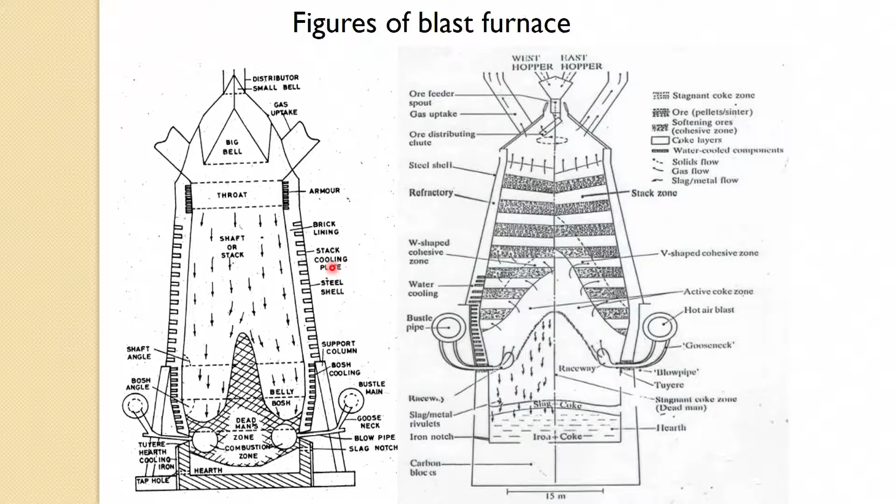So, there are two important operations in the blast furnace. One is the blow in and another is the blow out process of a blast furnace. So, a process to start a new or relined blast furnace is called blow in. So, either it can be a new furnace or it could be a relined one. So, the main steps in this process, how to start the new furnace,

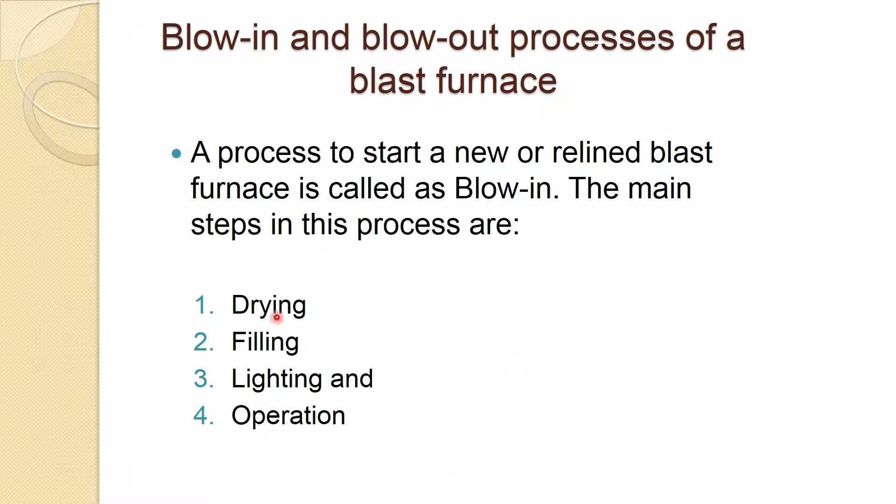are drying, filling, lighting, and finally the operation. So, we will discuss these 4 steps one by one, so you can understand the meaning of all these and how long it takes. So, the first step is drying.

So, a newly lined furnace contains a significant amount of moisture, which must be removed before the furnace is put into normal operation. So, this is a very critical and very important step, and one has to make sure all moisture is driven away, and the time spent on this is worth it rather than later regretting when some problem comes up during the operation of the blast furnace. So, it is worth spending time on removing the moisture completely from the bricks and other places.

And this can be achieved by adopting one of the following methods. Either supply hot blast into the furnace from the stove. So, if there are existing blast furnaces in the plant, you can always use their stoves to supply the hot blast. The initial blast temperature is around 200 degrees Celsius, which is slowly raised to 400 degrees Celsius, keeping the blast volume low.

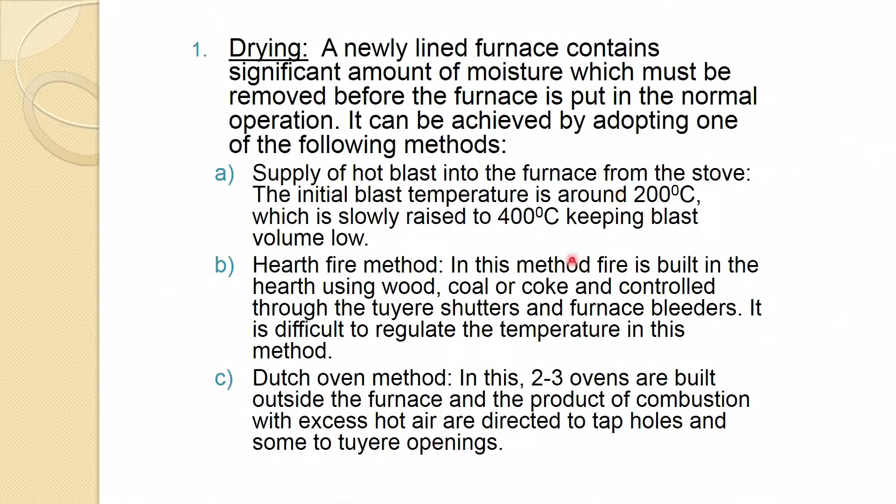So, by adopting one of these methods, one can remove the moisture from a new blast furnace or relined furnace, which is an essential step toward the operation. So, the second step is the filling. After drying and clearing of the furnace, if you have used the second method or some other, you have to remove whatever is left over there. After clearing of the furnace, its temperature is brought down by turning on the coolers, and inspection is carried out of all the material, mechanical, electrical and physical equipment before filling the furnace.

So, this is a very important and essential part in all blast furnace start-ups, because this is the last chance to rectify any problem in any of the equipment. Coolers are on, so the temperature goes down, and even personnel can go inside and check things, and check outside: cooler, mechanical, electrical, physical, that all things are running, and whether there is any problem, because when the furnace is in operation, all these things are quite expensive and very difficult to maintain. So, this to-do list is prepared, and all checking takes place during this time before filling.

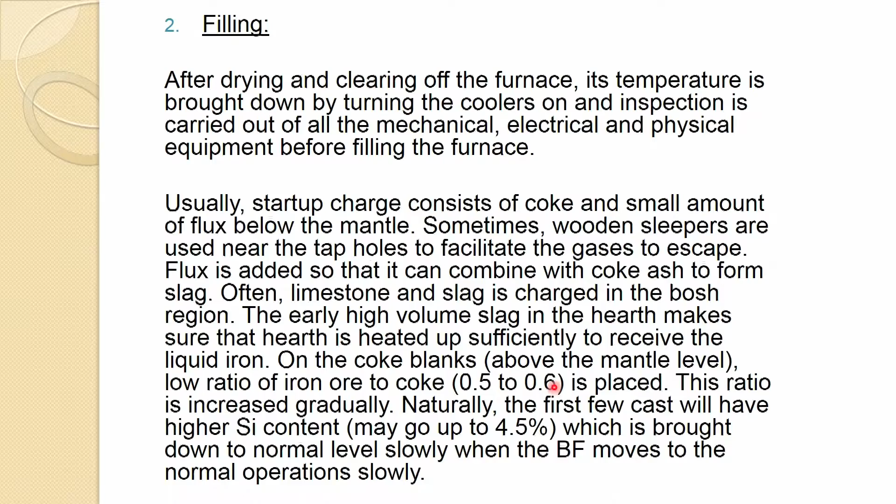So, as we mentioned in this slide, the ratio of iron ore to coke is 0.5 to 0.6, and slowly you increase it by 0.05 or 0.3 sort of ratio. Another way of doing it is to analyze the CO/CO2 ratio, and based on that you can slowly increase the iron ore content in the charge until normal operation resumes.

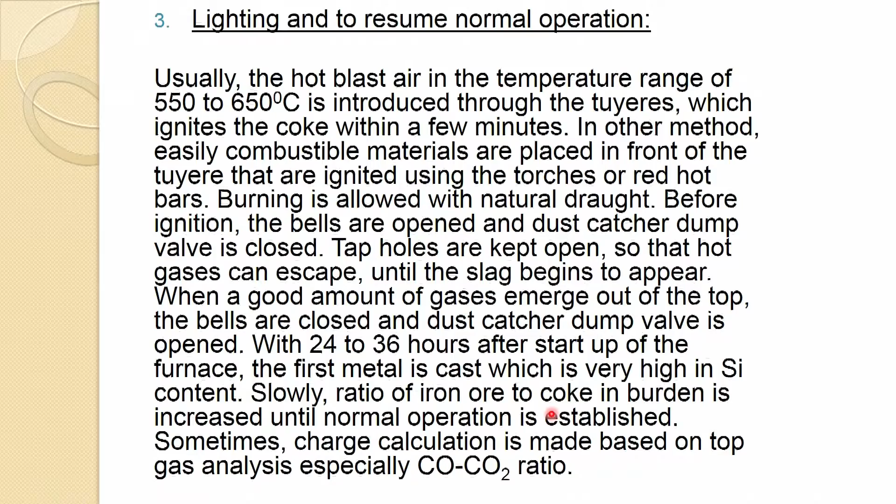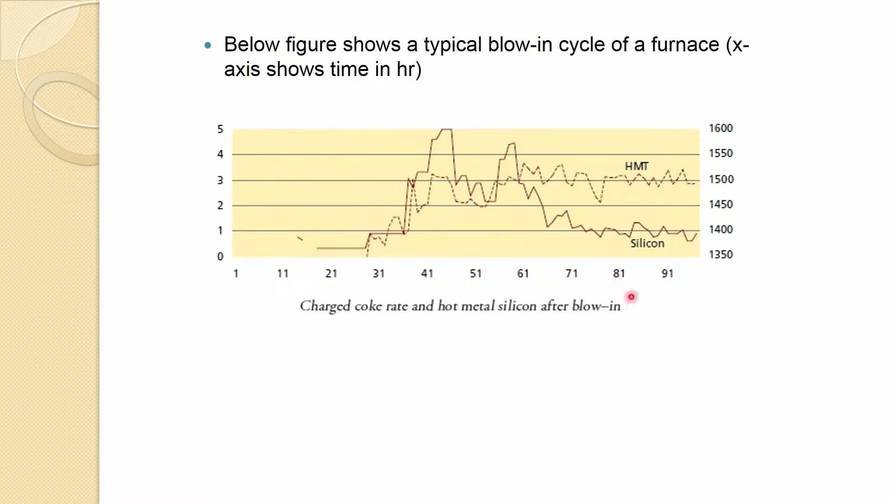And like blowing in, we also have the operation of blow down or blow out. After reaching the campaign life, the furnace is shut down for relining. The process of shutting down the furnace is known as blow down or blow out. However, between blow in and blow down, the furnace may at times have to be shut down for a short period for various reasons like serious breakdowns, raw material shortage, labor trouble, etc.

So, one is the furnace has reached its campaign life, so it has to be completely shut down and emptied for relining, or for some other reason one has to shut it down completely. Another, which is very often done in the plant, is due to a very serious breakdown in the equipment or something else. Sometimes you run into raw material shortage, labor problems or anything else. So, you have to shut it down, in a way you have to bank the blast furnace for a few hours to a few days, depending on the problem.

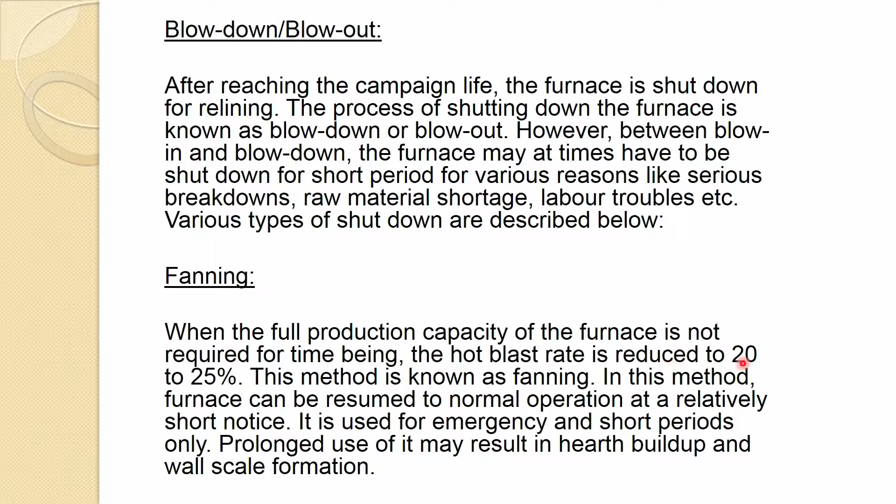Another one is back drafting. So, back drafting, when the blast is taken off for a short period of time. So, here you are taking off the whole blast, nothing is coming. In the previous one you can see 20 to 25% is reduced. So, here when the blast is taken off for a short period of time to perform various maintenance operations, the process is known as back drafting.

So, as soon as the blast is stopped, the bustle pipe is put under slight negative pressure. This is done by opening the chimney valve and hot blast valve to a stove where air is admitted through the peep sights and stove burners to burn the gas in the stove. Bleeders at the top of the furnace are also opened to pull some of the blast furnace gas out. In some blast furnaces, a special backdraft stack is installed for this purpose, avoiding the use of stoves.

So, many terms which are used here, excuse me, you have seen in those figures. So, I do not have to repeat, otherwise you can go again, look at the figures and see those things.

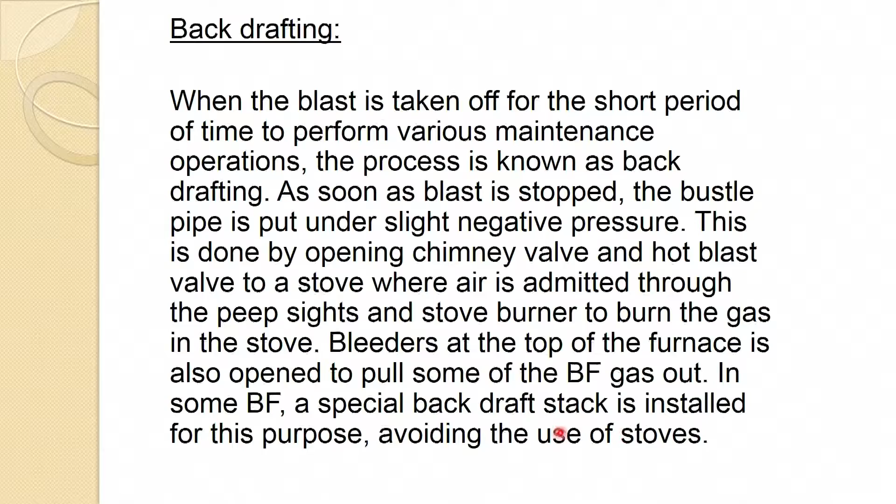So, in this one actually a negative pressure is put on the bustle pipe and stoves, the gas is burned in the stove. Bleeders at the top of the furnace are also opened to pull some of the blast furnace gas out, and in some blast furnaces a special backdraft stack is installed for this purpose. So, if this is there, then you do not send it to stoves and you avoid the use of stoves. So, that is called backdrafting.

And another process of blow down is banking. So, it is a standard procedure for a blast furnace to shut it down on a temporary basis, for example for scheduled repair, breakdown, etc. So, this is actually for a longer period of time in comparison to backdrafting. So, in this process the blast is totally taken off, covering the fire at the top with coke, closing up all air inlets and smoothing the stock with fine materials. Thus, the heat is preserved in the hearth so that the furnace can be put in normal operation with minimum efforts.

So, you are covering your fire or actually the stock with the coke, just closing up all air inlets and smoothing the stock with fine material. So, you are preserving the heat. For longer time shutdown, the banking burden is similar to the blow in burden. If you would like to shut it down for a much longer period, then the burden would be the same as we had in the blow in period.

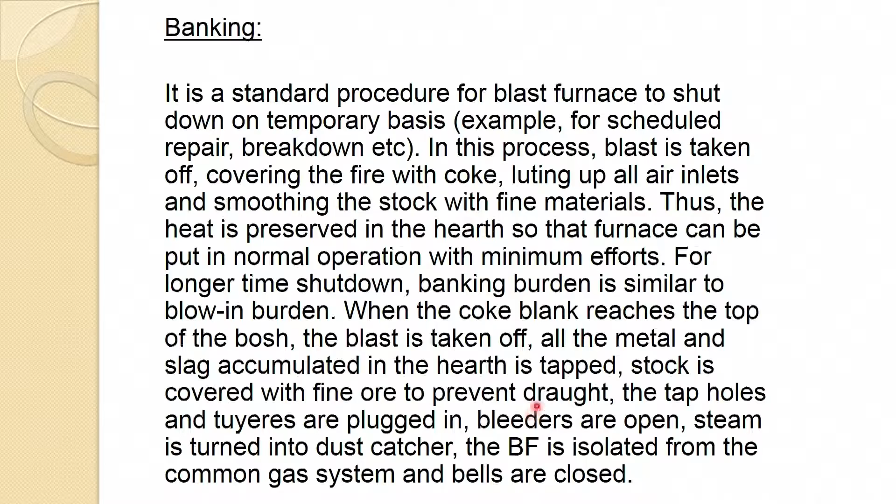So, these are the things which are done, and in this one it is necessary that every day one should inspect the level of the stock, how the charge is sinking. So, daily inspection of stock level is necessary to take the proper measures. The furnace is restarted by replacing the tuyeres and notches and charging sufficient coke to fill up the space created by sinking of the stock. So, all other steps are similar to the blow in operation.

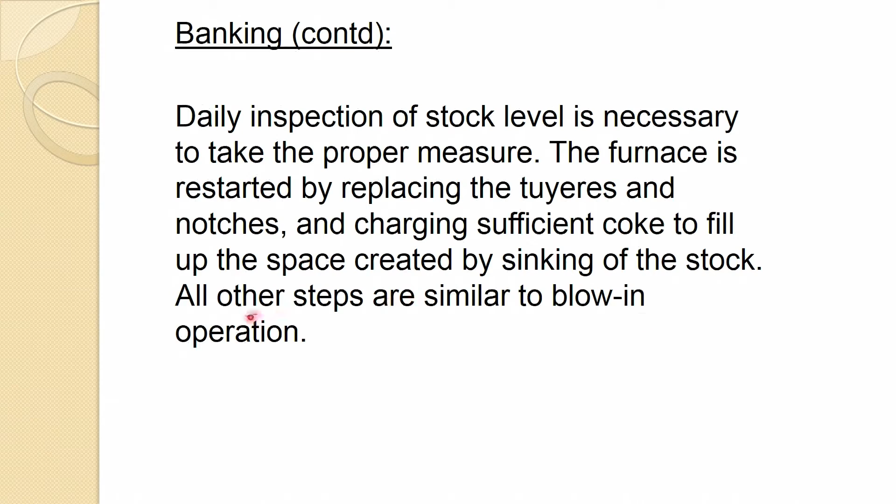So, this is actually for a longer period of time. If you would like to shut down the furnace, then banking is done. And in this one every day one has to inspect the stock and take the necessary action. It should not be descending very fast, the necessary action should be taken. So, most of the other steps in this one are like the blow in operation which we had discussed before.